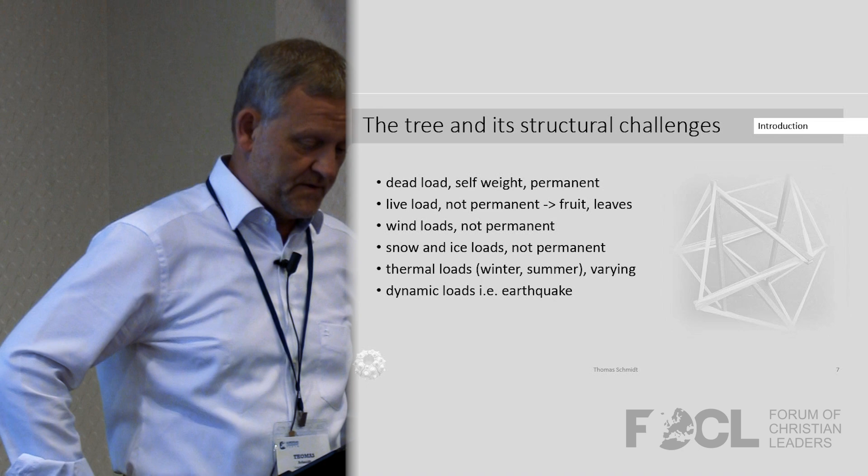Then wind loads, not permanent. Sometimes you have them, sometimes you have not. Come to Magdeburg. I invite you to visit us, and you will experience a lot of wind. A lot of wind. Snow and ice, not permanent, but a heavy load. Thermal loads, winter, summer, and dynamic loads. I'm especially interested in earthquake engineering. I'm teaching earthquake engineering, and that's dynamic loads.

Well, some basics from mechanics. Gravity. All the time we struggle with gravity. If I train this arm to get more strength, gravity is the one that is the challenge. It's working all the time. You cannot switch it off. It's all the time there, gravity. And what we try to do is bring it to an equilibrium, that we can endure it, that we can bear it, that we can take it.

Connected to this is force and deformation. For example, these are some utilities I can show you. I apply a force, and the result is deflection. The force is here, or I show it to you. This is the dead load, and it bends already under a dead load. And if I put at the end, let's say, rubber, it will bend more. This is a live load.

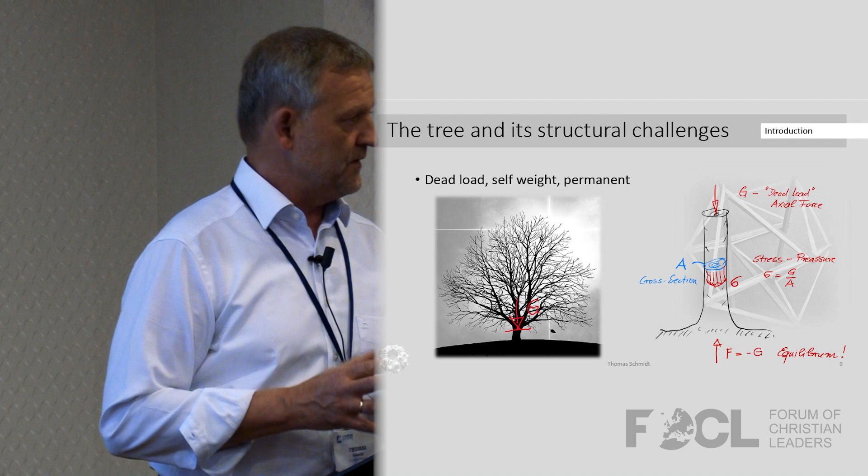And a structural engineer always has to struggle with forces and deformations, but forces are the integral of stresses. No structure, no person has forces in themselves or experiences forces, but it's always a stress, a distribution of forces. And I show you here as an example the dead load of a tree. You see a tree without leaves. Then I would like you to focus here.

If I cut it at this height and all the upper part is summed up as a weight, I can put it here on the stem, and this is the dead load of the total tree. And the equivalent of the force is the stress inside the tree. And the equivalent to this force is a strain. And the simple formula is you divide the total weight by the cross-section, you get the stress. And the equilibrium is the ground has to equilibrate these forces.

And if you have no ground, and that's already a spiritual application, you need a ground. And for us, you need Jesus. You need the ground to stand on. And this is one message I try to transport to my students. You need a ground. And I ask them, what ground do you have? What ground are you standing on? So that's a bit more complicated, but I already explained it to you.

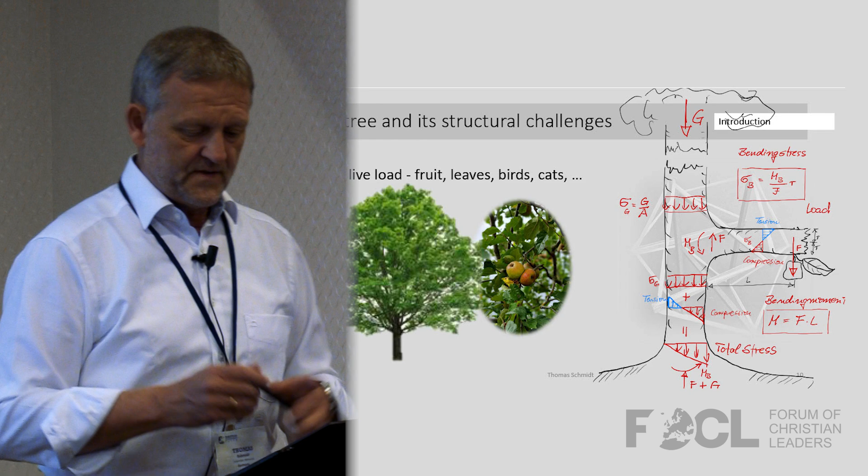A tree has live loads, and now you see the leaves and, for example, an apple. And the same picture, I cut off the rest of the tree here. And the total weight of the tree is here. And it produces an evenly distributed stress. But now, I'll come back to this cantilever. It's called a cantilever. And let's say I'm the tree, and I have a trunk here, and you put the load on it. Then you experience something that's called bending. And bending is nothing other than a change in stress distribution.

If I bend it here, I will show my students an experiment, and I ask them to put their finger where they expect tension and where they expect compression. And I'll come back to this. So bending causes not an even, constant distribution, but as shown here, a distribution changing from the positive to the negative one. And we have to bring this also into equilibrium. So it's not just the force going straight to the ground, but you have bending. You have to ensure that this tree will bear bending.

So it has roots. Another example for you: you must be rooted in Jesus. You are founded on him, but you have to have roots. That's essential for everyone, to have roots.

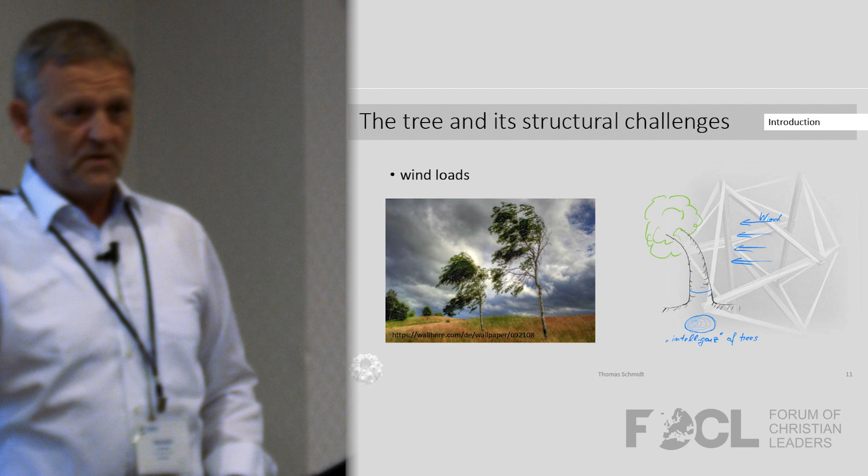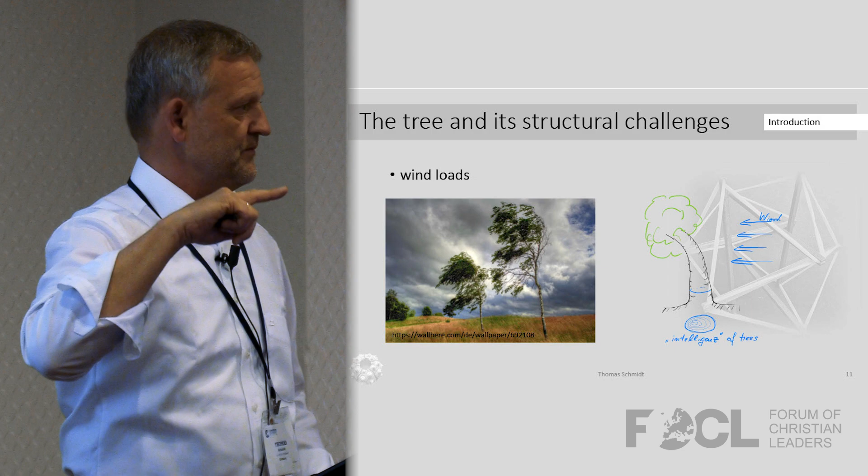So next thing, there's wind. That's an interesting load because it's sometimes there, sometimes not. The pictures are my own design. And what I would like to show you here I call the intelligence of a tree. Because it grows, and after some time it figures out where the wind mostly comes from. And it develops its skin according to the loads. And you get closer rings the more often the wind comes from a certain direction. And you can see it in the shape of a tree.

If it's always in the wind direction, it's bending down. At the sea, you can see it. And if you cut it, you see the tree rings are designed to be where the maximum stresses are. I always asked my engineers, how does the tree know?

In a sense, what's the nervous system of a tree, at least? How can you figure out that this is the case? And that's very, very interesting.

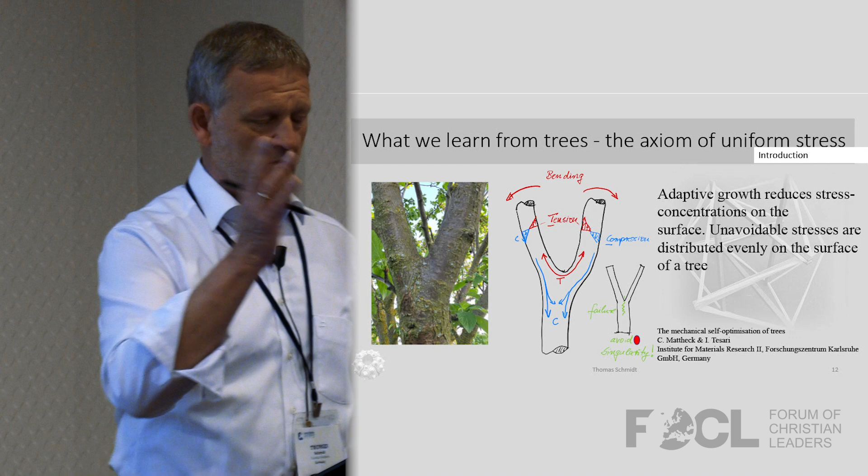So the next step is we observed especially trees, and this is the work of a colleague of mine. He's a theoretical physicist and is an expert in tree statics. He's a fracture mechanics guy. Most of you will not know what this is, but I brought you something with me. This is my equipment for my lectures. I explain something, and if you try to sleep, you have no chance.

But I take this off to show you what I painted on here. This tree, let's say, has several branches, and they bow down, and the other side also. And you try to get them into equilibrium, and the stem has to do this. But there's a certain point, in the mathematical sense, we call it singularity. And if you have singularities, you cannot bear it. No material in this world will bear the mathematical singularity.

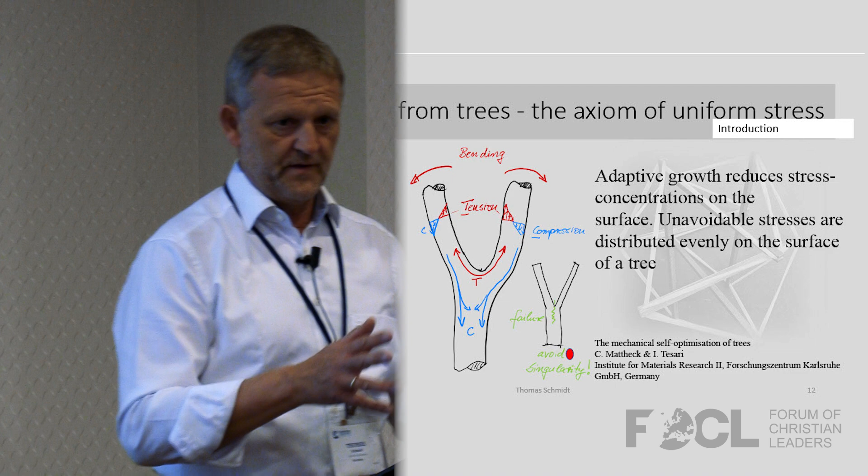So another intelligence of a tree is, he figures out how to distribute the material so that the singularity vanishes. It's incredible how it knows, and we learn from it. Everyone will know what will happen if I tear this apart, it will crack here. This is principal stress, it's infinity in this, and the tree is so clever. And this guy here, Mr. Mattheck, had a whole theory and called it the axiom of uniform stress. When I finish my talk, I will come back to this, the axiom of uniform stress.

It seems that nature, I call it nature for you because I could always say creation, the creator designed it, and it's so incredible that the tree knows how he should order his material and how he should grow in many aspects. So with this distribution of stresses, every structure, every creature tries to get uniformly distributed stresses, not to have these singularities.

Stress, there are two kinds, tension and compression. There are maybe singularities you have to face, and I show you how this structure will bear their loads. They have the same loads. All the listed loads for the tree are the same for civil engineering structures, completely the same.

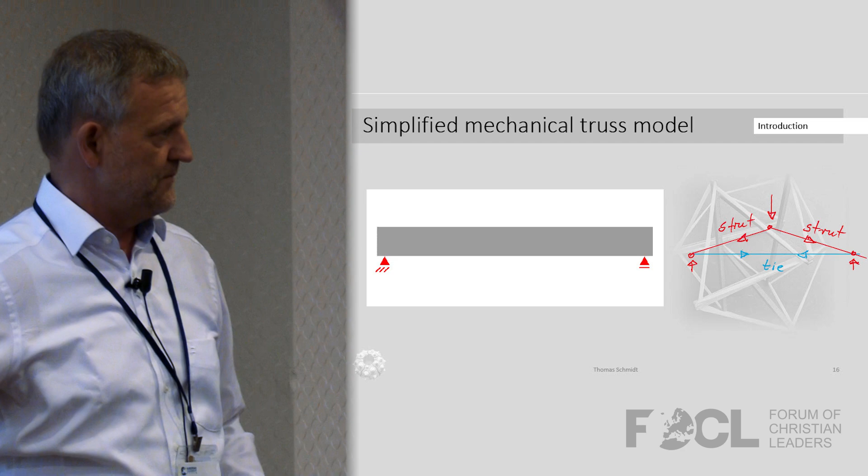So everyone of you will know how it is done. Inside this structure, rebars. We enhance the capability of taking tension where tension is, and we place rebars there. Reinforce it. But I want to show you, if you are just concerned with the stress in the middle and get it to equilibrium, you put in a bar there and it will work. But that's not the whole truth, and I will show you. If I take a very heavy sack and try to put it in this, keep it here.

I'm the tree, I'm in equilibrium, and bring the load down. But there's a material-dependent parameter and behavior that most people don't like. And unfortunately, I have no burger here, because with a burger you can show very well what's happening. If you have a very good burger with a lot of sauces, a lot of cream, and you put it in your mouth and bite, what will happen?

Well, it's going aside. And every material has this effect. You push it here, and perpendicular to it, it goes this way. And therefore, if you look at TV at the heavyweight people, they have a belt here. Not because they are freezing or something, but because of this behavior. You push here, and perpendicular to it you get stress, positive stress. That means tension. And concrete doesn't like tension.

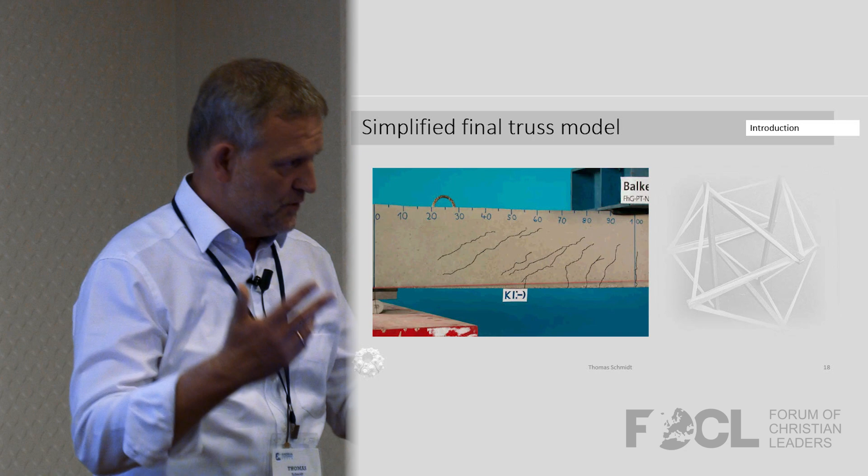Why do I dwell so long on this? Because this happens in every structure, in every animal, in every creature. It happens the same way. Simplified mechanical truss model: engineers model behavior, and they try to reduce the load-bearing system to the essential parts.

And I brought this, because this morning I took off my shirt and I realized I have this structure here. Do you recognize this structure? You use it this way. You put loads on here, and where is compression and where is tension if I hold it here and you put your coat on? There are three arms, so where is tension and where is compression?

Okay, you're a physicist. The load is here, and it tends to have the pressure here. The other way around. If I take this load and put it here, then it is the same. So the engineers found out we have to have at least these struts and this tie, so we can bring it to equilibrium. But again, the most important thing is the foundation. You need a foundation.

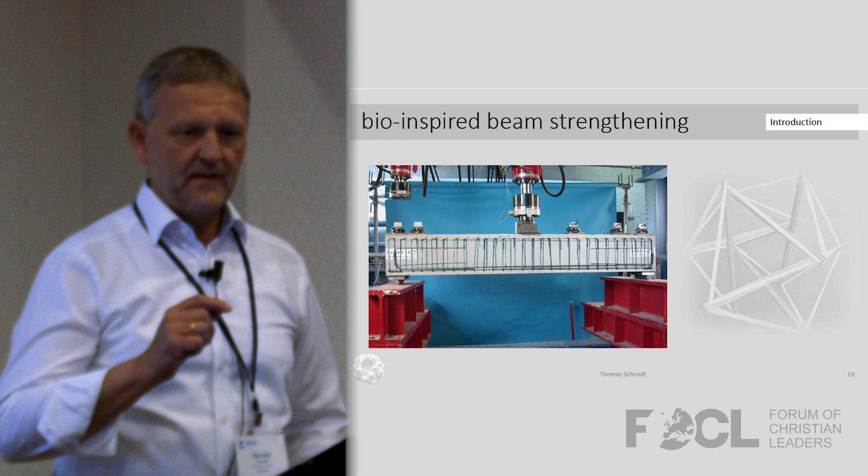So now I'll show you what we can do against this failure. If I am a heavyweight lifter, I take this belt so that I cannot break in this direction. I once saw an Olympic one, and his intestines came out because he forgot his belt. So what is the engineering solution to this? They are clever enough. They build belts into this structure. Not only this load-bearing tension, but a belt everywhere.

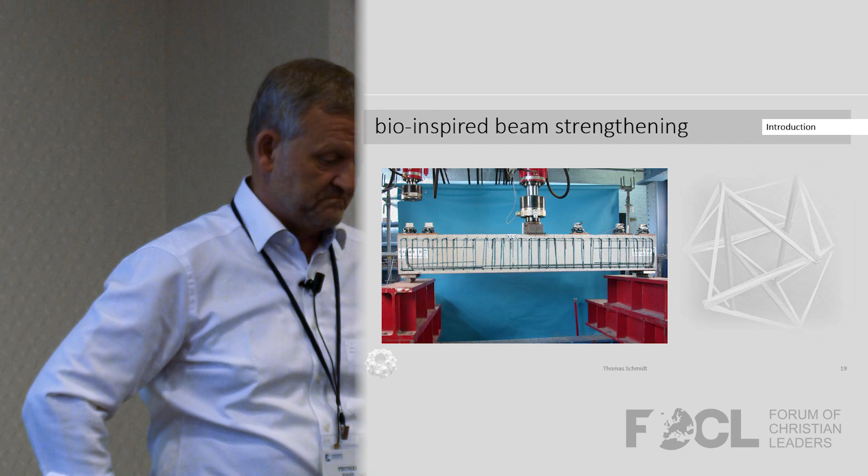This is what you have shown, and this is the model we use to bring a simple beam to equilibrium in all periods of its load experience. So this is the so-called reinforcement. And you see, these are the bars for tension, and these perpendicular ones are exactly belts. They put belts around so this failure cannot happen.

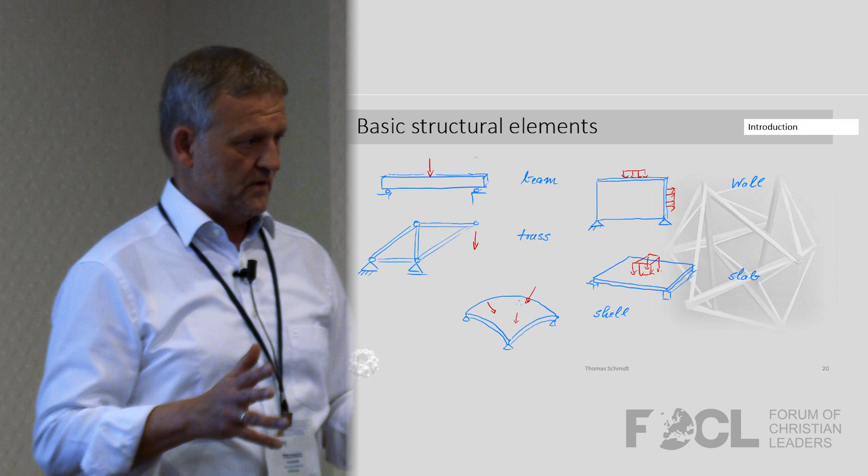So the next step: these are the rudimentary structural elements we use in structural mechanics. The beam and the truss structure I explained to you. The more complicated ones are walls, slabs and shells. I will not explain them because it's a bit more complicated. But the very foundation, stress, is the same in all structures. I explained it to you two-dimensionally, or sometimes one-dimensionally; a strut is one-dimensional. So I'll go through this a bit faster, because you now have the foundation in an engineering sense to understand what follows.

There's a person I got to know during my studies, Joseph Monier. If you are German, you may know Moniereisen. Ever heard this word, Moniereisen? This is to credit Mr. Joseph Monier. He has the patent of reinforced concrete. And the next one I knew personally, and I learned from him to build shells. This is Mr. Isler. He's a well-known engineer worldwide. He constructed beautiful shell structures.

Then this colleague, Mr. Mattheck. I got to know Mr. Baumgart at a conference, and he told me about his examinations of a tiger claw and what his outcomes were. And then I will show you what I'm personally doing now. I try to give this very beam I showed you a nervous system.

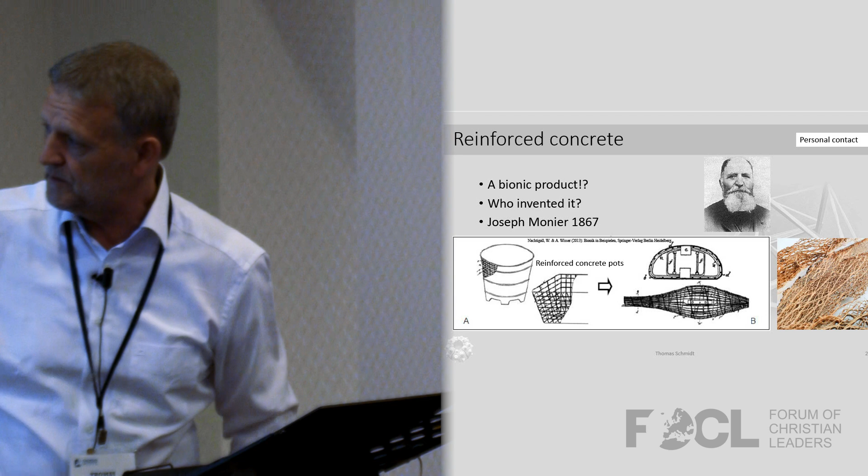And this is how it's spelled, Opuntia, a cactus. He realized when they get dry, they have this structure inside. And this is a network, a net. What's missing? The flesh around is not very good in tension. Pressure, quite good, but tension not so good.

And when he looked at this here, he got this idea: I have some material that's good in compression. What helps this material to get better in tension? So he laid wires in it. And that's how he invented the so-called reinforced concrete. And I work all day long with this.

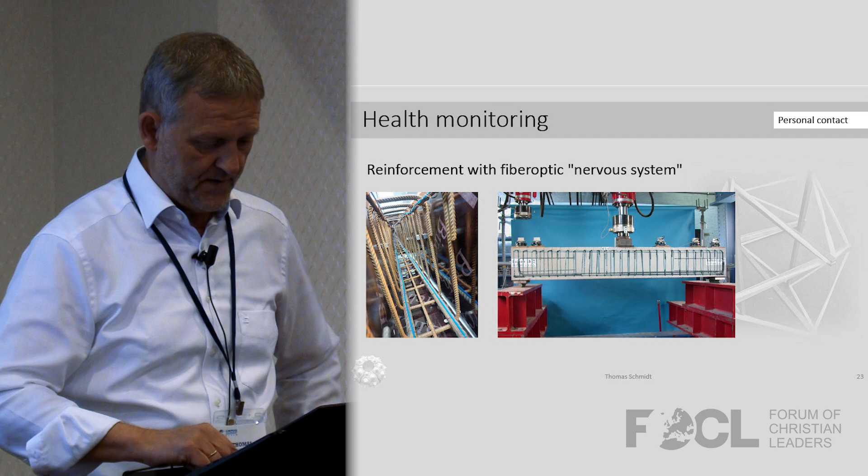So that's the slide with health monitoring. And you see here not only the bars and these belts, but these blue lines. And this is what I call the nervous system of these here. A year ago, I started a research project when I got inspired by a technique that is laser and fiber dependent, and I'll show you how it works.

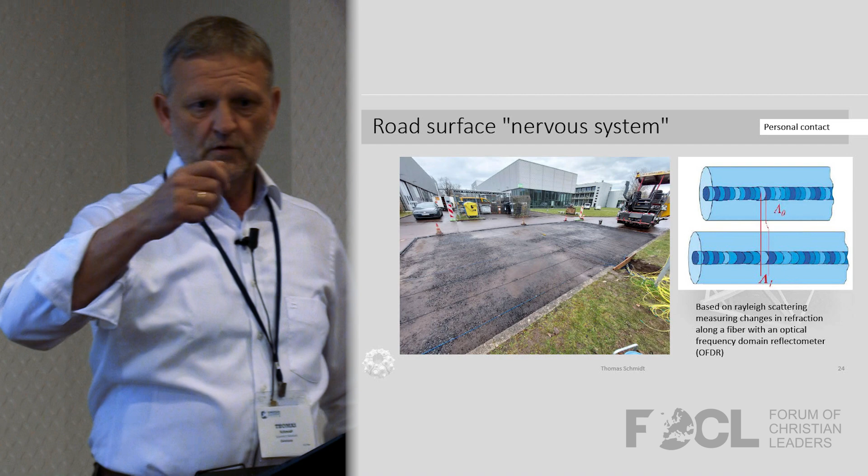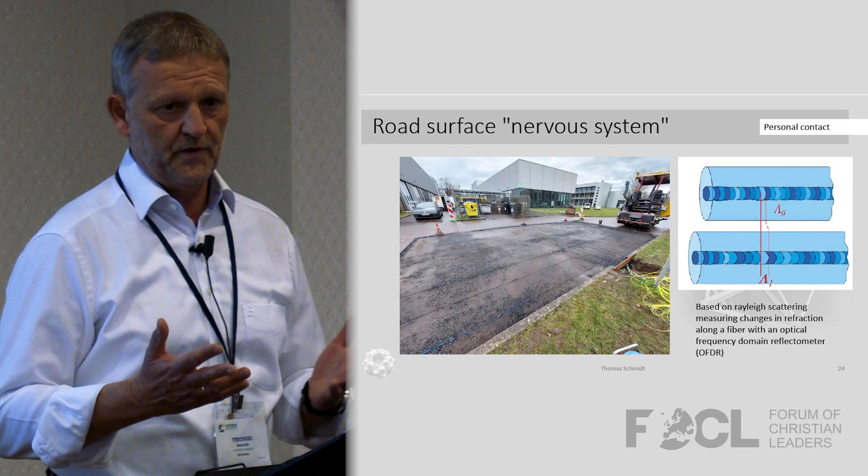It's based on so-called Rayleigh scattering. You have, let's say, a telecom glass fiber, you shoot in a certain light with a laser, and this fiber has the characteristic of scattering light, and you can measure it. And the change in refraction along the fiber is a measure of the strain or of the temperature in it.

And we as engineers are deeply interested to give our structures a nervous system, so that we know when they will fail, when they need repair. For 15 years I studied systems, and I could only listen to, let's say, a 200-meter bridge at several points. And that's not enough. You have to listen to every single point; the crack, you don't know exactly where it will come. So you have to have a nervous system.

And now I combine this with new methods of machine learning and intelligent design to train my nerve system to figure out what's going on. And the end will be to develop new materials. And this one here is the next. We embed it right now in streets because we do not know exactly how streets fail. You experience this all the time, you have to wait so long because all the streets are damaged, and we try to figure out how it happens.

And we put a nervous system in this part of the street, and you see it. That's in Magdeburg, in our lab. Behind our lab, I built this in the street.

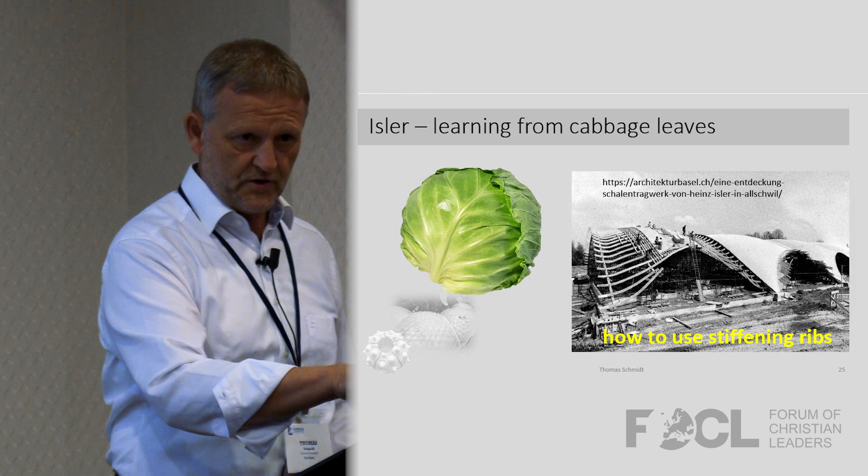So, learning from a cabbage leaf. This is one lesson I got from Mr. Isler. And he taught us the most important thing. This is the introductory lecture for the Bionics lecturing in my university. What I want is that they put away their smartphones and don't look at them, but that they look at a cabbage leaf. I was trained this way. What shall they learn from a cabbage leaf? Well, Mr. Isler showed us what he learned from the cabbage leaf.

And the construction you see here is a shell structure, a very thin concrete, or in this case, wood structure. And he got the idea by looking at a cabbage leaf and mimicking these bars here, these trunks, this system. And he came up with very efficient structures.

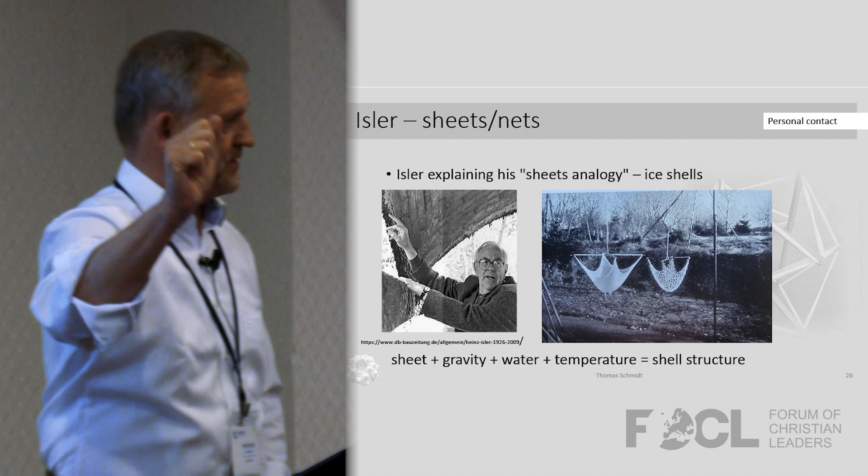The next very intelligent idea he had, he experimented with sheets and nets. It was winter, and he showed us a movie he took in his garden. He hung up this sheet, then he took water and spread it over it, and it froze. And the shape remaining is what you see. Then he turned it 180 degrees, and he had a perfect shell structure.

So he learned by gravity on this sheet with frozen ice. It was a very clever idea, and in this picture here, he explained to us how he got the idea and how he realized it in this structure. And this is another example of a very well designed and very thin shell; it's reinforced concrete in this case. It's very clever to do it this way.

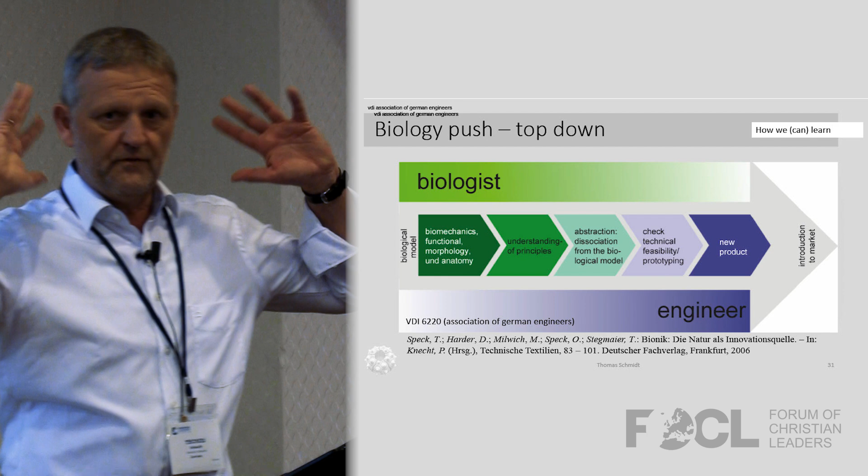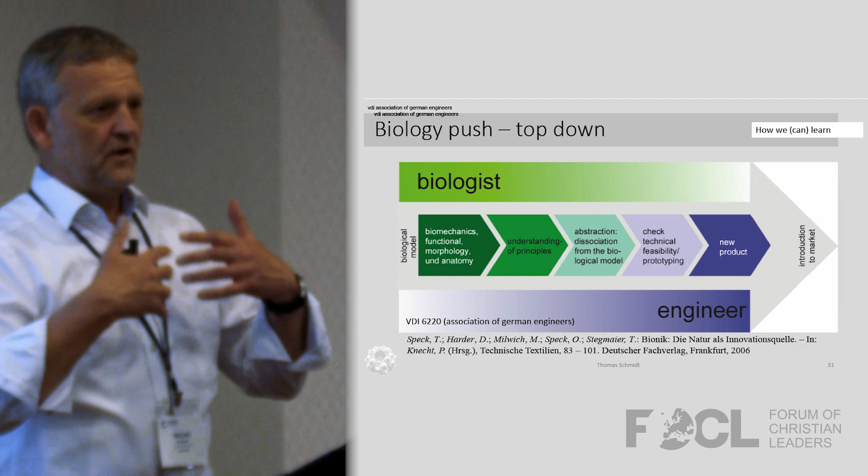And yeah, you start with the biologist. He gives the analysis of the structure, and he shows you as an engineer what this structure is built of and what its capabilities are, and explains the system to you. Then the engineer is listening very, very carefully, and he hopes to grasp some ideas of it. And then together they develop methods that they can use. It's never a copy. It's always an illusion, or you get an idea. But we want to systemize it. So we set two people together, the biologist and the engineer listening.

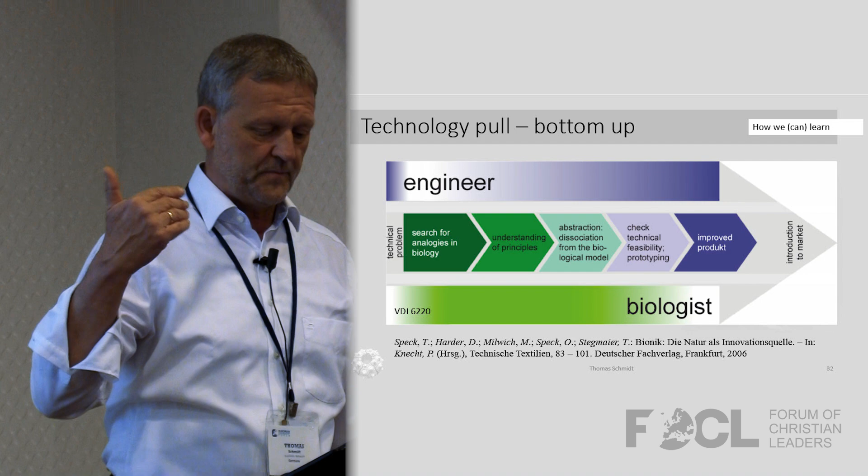Or the other way around, the engineer: this is the technology pull or bottom-up system engineering. The engineer has a problem, and he is figuring out how he can find the solution. Maybe there is a solution already in biology. And he asks the biologist, and there are databases. I go through this a bit faster. You see these two approaches are actually working now.

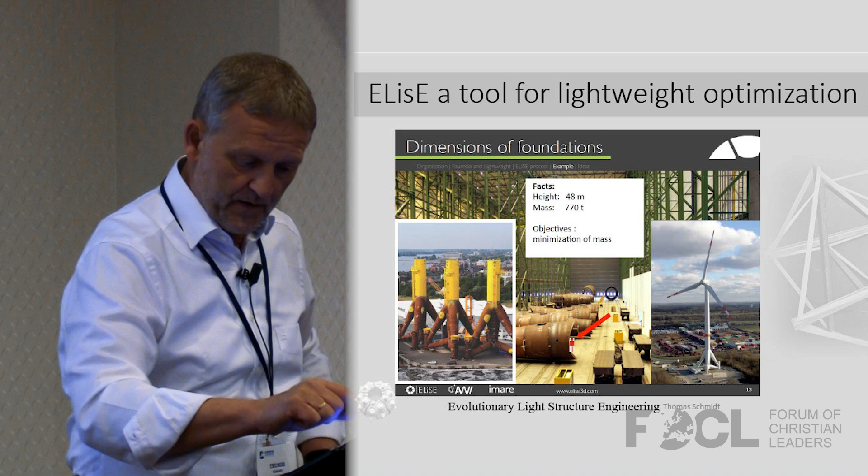And I show you a real-world version here. This is all the structure I will show you. You all know these windmills. And they are seeking the optimum foundation for them. And they have databases of diatoms. And if they search for a solution for how to design it, they use databases of these diatoms.

Here you see the momentary structure. This is the way they build it. And they want to optimize it to get a better solution. And these are the steps they are going through. They are screening databases with structures coming from, you know him, Ernst Haeckel. He published a book on nature, and he drew incredibly good pictures of living creatures, especially these diatoms. And we now use it as a screening source to get to a structure.

And then we evaluate it. That's the structure assessment. This is the database. Then we evaluate some. We find out, oh, that seems the optimum in nature. Then we do the abstraction and analyze this with certain opportunities we have, so models will fit. And then we come out at last with the assembly and the optimal design. And then we use it to build the next optimized structure. So I'm back to the presentation now, to the examples.

So examples, I think most of you know Mr. Eiffel. Maybe you and your wife visited it once. We did. He's not the engineer who did the construction, but who sold it. And it was in 1889, the centerpiece of the World's Fair. And he got the engineer, Mr. Koechlin. I know some of his relatives.

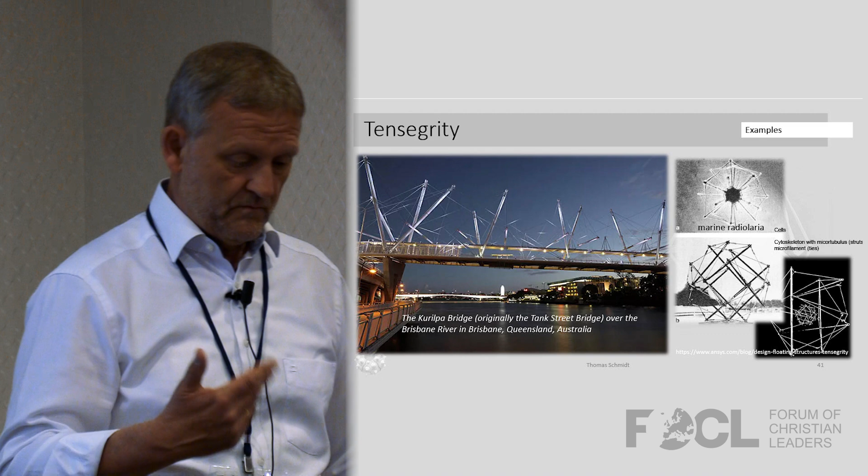And the last one, or I have only one in addition. This is what you have, the so-called tensegrity structures. These are structures that are found in your very single cell. The analysis of the cell structure gives, many of the biologists suggest this, and the engineers agree, that there is a strut-tie system. And it's very capable, you can just push on it, and you can deform it in an incredible way. And our cells are built with this. There are pressure struts and these tension bars in every cell. And the structure is called tensegrity.

And here you see a bridge that is built. And actually it's kind of a copy. And here the marine radiolaria, that's a living being where you can see it working, how the structure is built of these tension and compression bars. It's very, very intelligent. There's a special mathematics behind it, and it's mathematically completely solved how this works.

And it's incredibly deformable. And the last example I will show you: when I came here before, Alexander visited us, and he asked me, maybe there's an example where something is already developed in technique. Can you find it in nature? Yes, you can find it, but much more sophisticated. And what I can show you is excavator arm versus spider leg. The same principles are working here. It would take too long, because I would give you time for discussion.

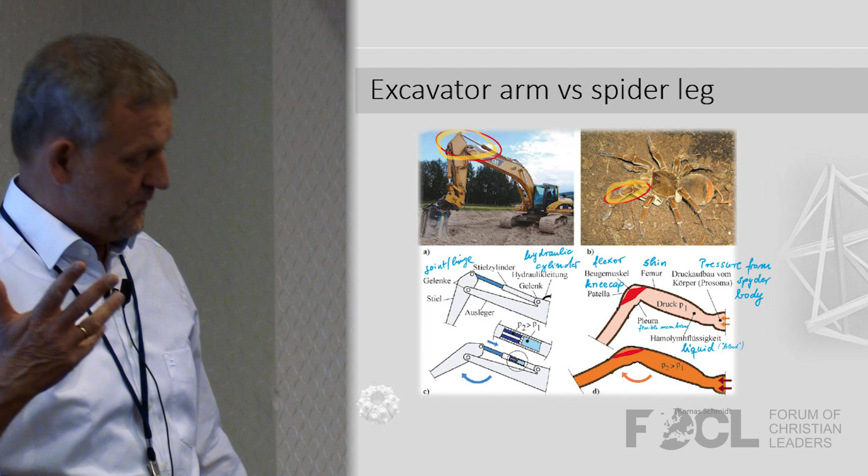The same principles: you have a hydraulic jack to move the arm in the right direction and to make it work in tension and compression. And you have hydraulic cylinders that can pull and push. And the same you have in the leg of a spider. If you look at a spider and you find it dead, look where the legs are when they are dead. These are their legs, and where you will find them when they are dead: nearby. Why? Because the hydraulic is away. I call it the blood, the liquid is away. The liquid from the body gets pressure, and you can stretch it and take the pressure off and you can move it. And if it dries out, the leg is at rest. This is nearly a one-to-one copy of an excavator arm.

And I would like to invite you to the virtual exhibition. Everyone can visit it on the internet if you like. You can go through it and look at many different examples, incredible examples that I cannot show.

I will end with two spiritual applications. When I studied reinforced concrete for the first time and I became a believer, I realized I have to do a lot as an elder in my church to bring people to equilibrium, to reinforce them. And every one of you needs reinforcement. And if you don't know the loads that make you break, you should figure out what makes you break. And then you should figure out how you can equip yourself spiritually to not get cracked, to not get damaged. And you have this foundation in the Lord Jesus Christ. He is the foundation, and the Holy Spirit is the reinforcement in you. And you have to activate it all the time.